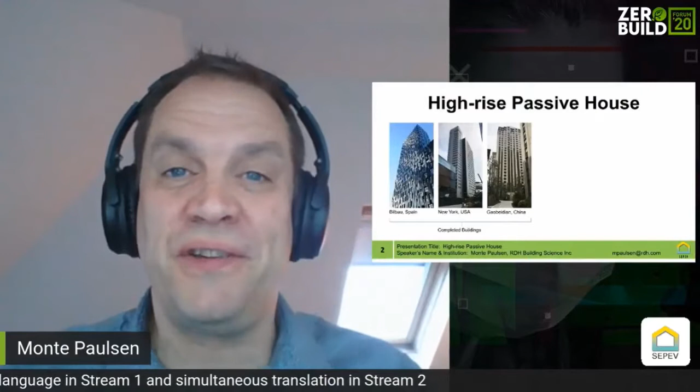So my presentation is very straightforward. I'm going to present on 3 high-rise passive house buildings that are completed: one in Spain, one in the United States, and one in China. Then I'm going to conclude with a few observations about 3 high-rise projects we're doing here in British Columbia that are still in design and will begin construction early next year.

I work for RDH Building Science. We have offices in 9 cities in North America. We do building enclosure consulting and facade engineering. We've actually had quite a few people in Turkey at window manufacturing plants, because Turkey is becoming such a leading manufacturer of high performance products. We do energy and sustainability work, including passive house, but we've also done several of the largest net zero projects in Canada. We do research and forensics, and we do repair, rehabilitation, and renewal of existing buildings.

We also happen to be the largest passive house team in Canada, working on multiple large projects across the country. We work primarily in the international passive house standard, but we also have people on our team who work in the US passive house standard, who do living buildings, net zeros, and others, and we certify projects around the world.

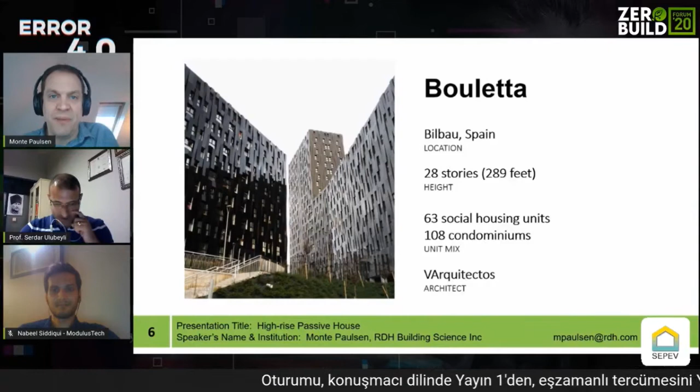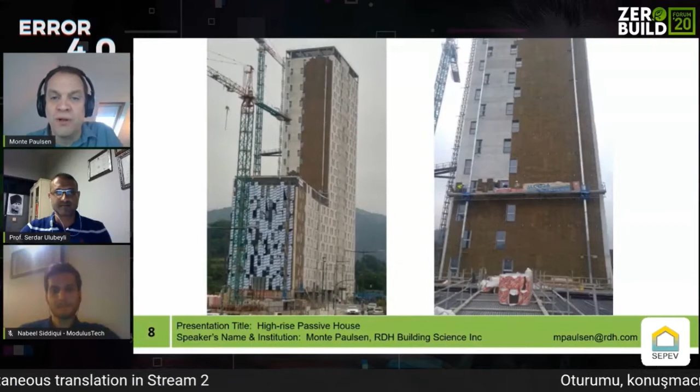Okay, the first project I want to talk about is Bolueta in Spain, currently the tallest passive house building in the world, and a beautiful example of passive house affordability. This is a very simple masonry building, a construction type very familiar to much of the world, and certainly to anyone in your part of the world. Masonry, concrete infill. Over the top of what could be a conventional building is rock wool insulation, creating a blanket that basically transforms the building into a passive house, and that's fairly simple to install.

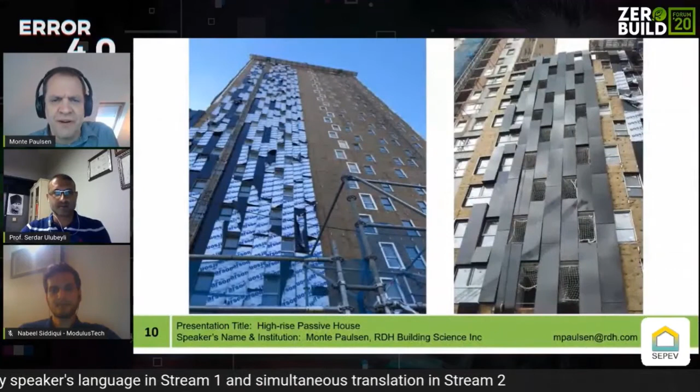It doesn't require tremendous trades training. It needs to be continuous, and the girts holding the cladding need to be thermally broken. Then a very simple cladding mechanism goes over the rock wool. The cladding also creates opportunities for the ventilation portals to come through the wall in different places. This is a mock-up of this simple system.

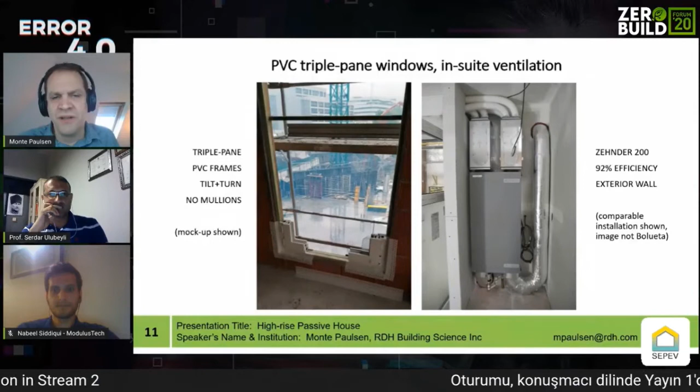Vinyl windows, again, really common windows. In fact, these types of frames are made in Turkey and many other places, being one of the most affordable ways to do windows in a large project. And ventilation like this - this is not a photo from the project, but a photo of a similar installation of Zehnder 200 heat recovery units in every unit. I know many of you have been all day learning about Passive House from some of my colleagues at Passive House Institute, so you've come to understand the importance of triple pane windows and heat recovery ventilation.

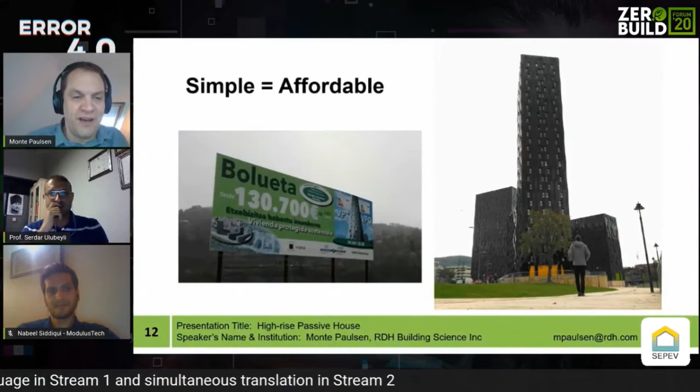This was a very affordable project for many of us in Vancouver. The prospect of buying a 2-bedroom or larger unit for only 130,000 euros would be very exciting. It's the simplicity of the approach that made this an affordable high-rise Passive House project. Really great work by that team.

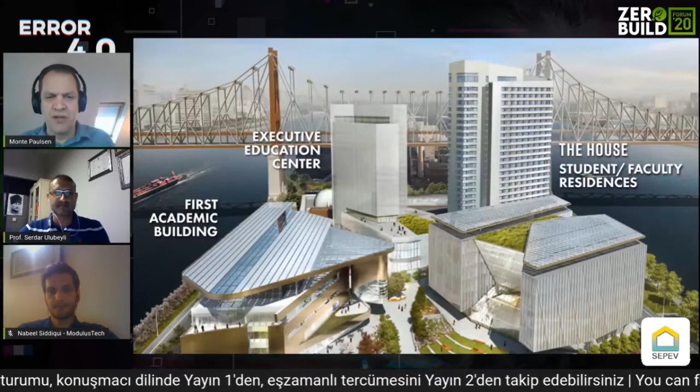This is an interesting campus on Roosevelt Island where they have four new buildings pursuing different strategies. There's a net zero project, a very low embodied carbon project, this Passive House project, and Cornell University, with this new campus, is intentionally exploring different approaches to resilient, low energy, low embodied carbon design. We'll monitor them over time and try to learn lessons between these various approaches.

The Passive House building has a fairly straightforward ground floor, with a large lobby, bike room, the kind of thing you'd expect with a large dormitory. The ground floor also has very large glazed areas - thermally broken aluminum windows that allow the view across the river to New York City.

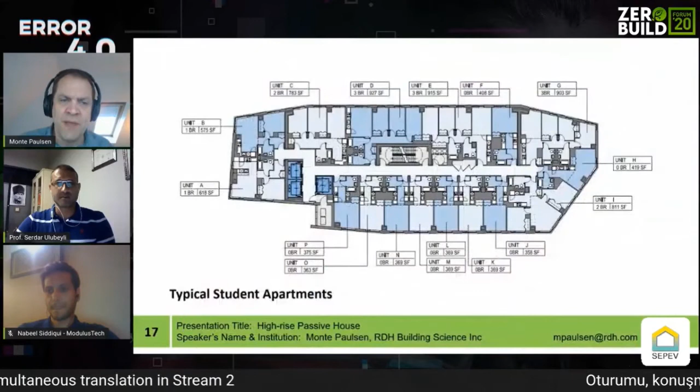As you move upstairs, the student apartments are fairly small and typical. This particular university hosts students from all over the world, so they deal with really diverse cultures as people come from many places to pursue technical education in New York. Here's a picture of a typical student bedroom.

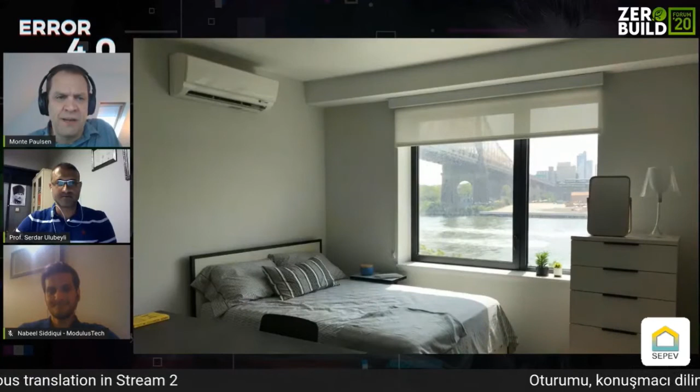You can see the small mini splits, the air-to-air heat pump system that runs for heating and cooling through the building. Inward opening triple pane windows, fairly simple kitchens in a style typical in North America. There's usually an exhaust hood right underneath the microwave.

The Cornell project did a great job of what we sometimes call strategic glazing. They put big windows where necessary, but did not overdo the glazing in other places. This is a great example of that - you see exercise rooms so often have floor-to-ceiling glazing, which is actually embarrassing to some people if they're on the second floor and someone's looking down at an awkward angle at them while exercising.

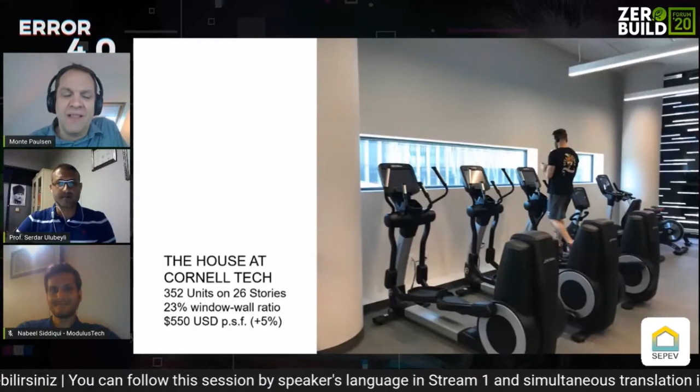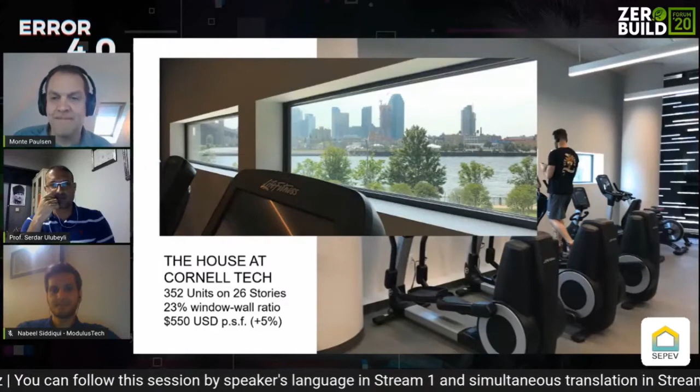This project has this well-placed, simple window that gives a fantastic view back across the river towards the city. It's a great approach where we want to start putting glass where it's needed - where it brings views, light, ventilation - but not over-glazing just because we have the technical ability to do so. This is part of what can make larger Passive House projects much more affordable. But on the upper floor where there's a fantastic view, go for the big windows.

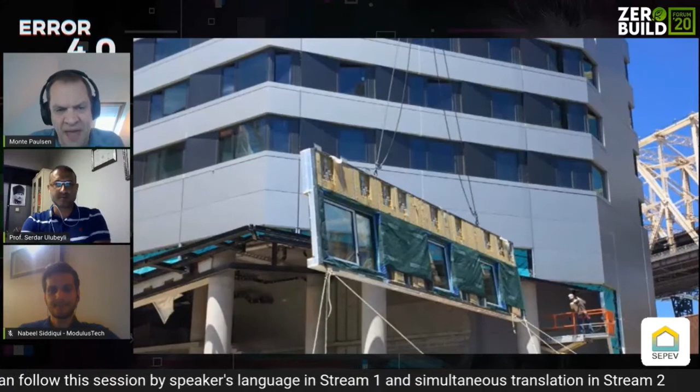This project used, like most large Passive House buildings, a double wall system with rock wool insulation in both places. It actually had both an interior and exterior air barrier. This entire wall system was prefabricated in an off-site factory. These steel-framed panels would arrive vertically on a truck off a barge on the site. They'd be craned up into place and attached to the side of the building initially with large hooks, and then workers would go out and bolt them down.

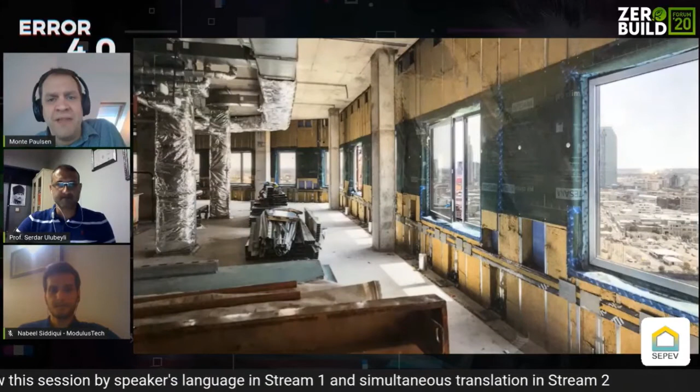If you look at the bottom, you can see here and here and here the places where they've been bolted down. And then you see the beginning of the air barrier - they've started to put in, in this case, Proclima membrane along the inside after all of the insulation has been backfilled in around the attachment points.

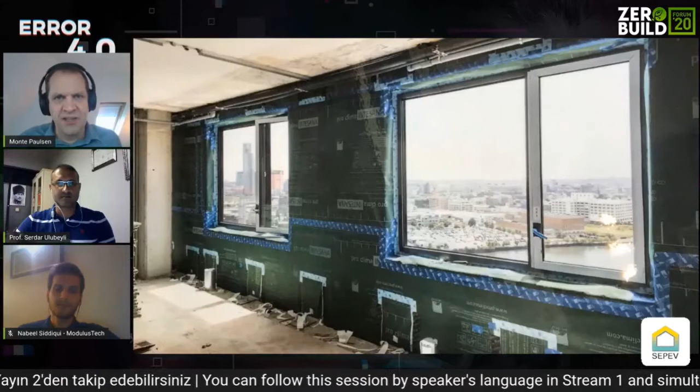Note that this is a hanging wall, not a bearing wall - the weight of these units hangs downward. It's essentially the same thing as a unitized curtain wall you might see with a traditional curtain wall building, except with completely opaque panels that are larger. The risk you face with this sort of thing is that all of the barriers - the air barrier, the wind barrier, the weather barrier - are all in the same location, so it's really important to get the connections right.

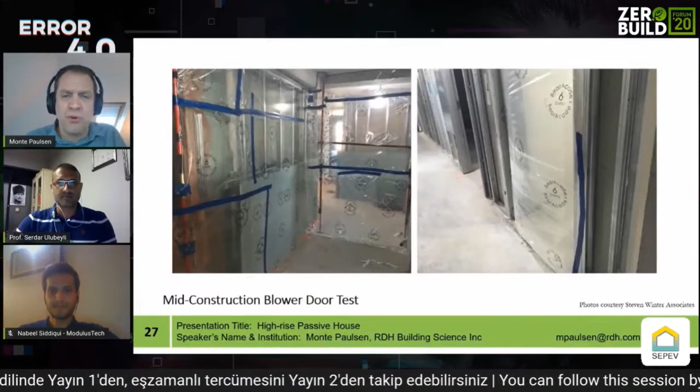Mid-construction blower door testing is a bit more complicated on large buildings - you have to seal off elevator shafts and other large areas. But at the end of the day, they ended up with a very elegant, simple enclosure on this project.

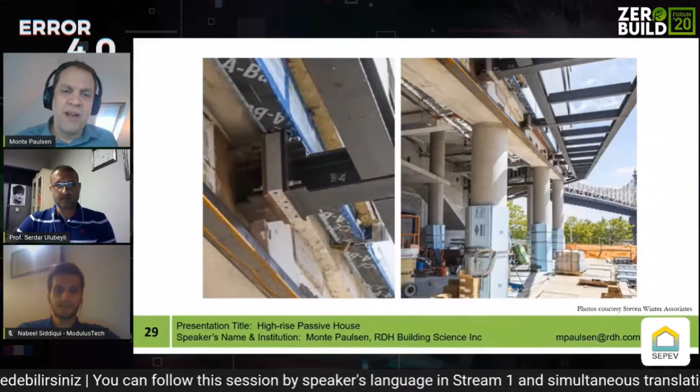Window to wall ratio of about 25%, give or take - so the glazing area is about 25% of the total. The lower glazing areas, while still providing great views, is one of the keys to making large Passive House projects affordable. Lots of thermal break products - you see here and here these thermal breaks so that the overhangs don't create a thermal bridge back to the building.

Here's another space where you see these thermal breaks on the roof for the equipment and other pieces happening up there again, and then there'll be insulation placed around that.

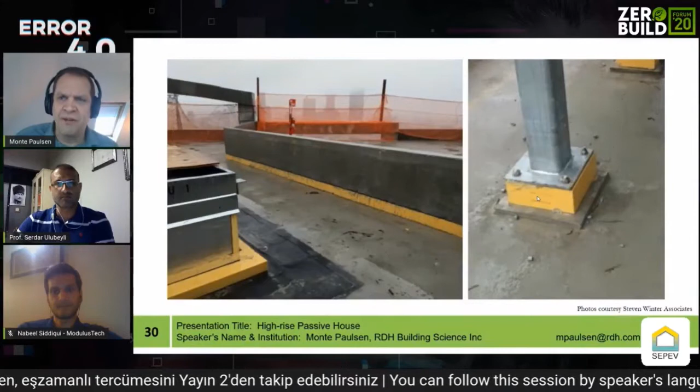Most large buildings use large ventilation systems. This used a single heat recovery ventilator on the roof, different from the Spanish project we saw earlier, which had a small one in every single unit. This had one very large HRV outside. It creates some challenges to performance assessment for certification, but these are certainly surmountable in a large-scale project.

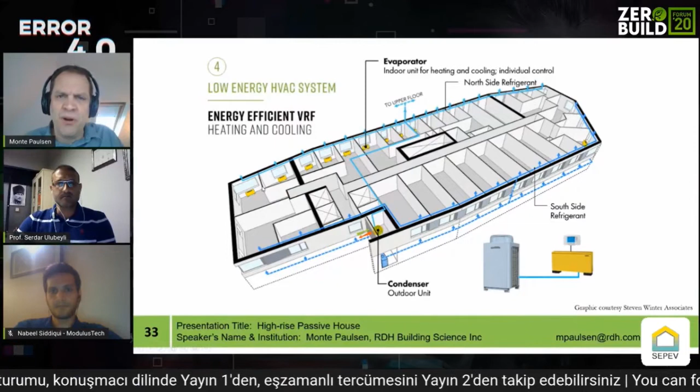In most cases, we're seeing large buildings use large units like this, but not universally. And then a regional heat pump system for cooling and heating with an outdoor condenser placed on a little balcony here, and then a local unit in each apartment. It was important, again, because this building was hosting students from all over the world.

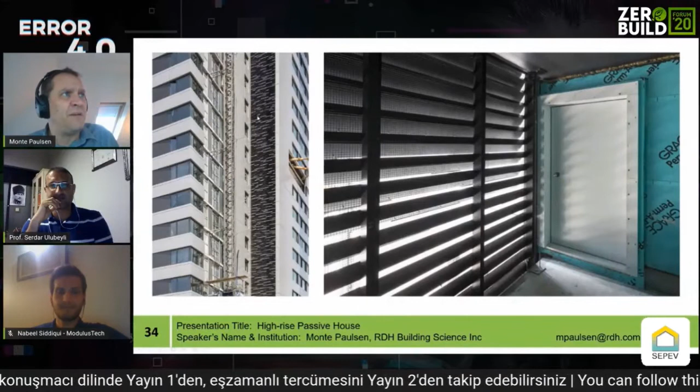This is a look at the balcony where the outside units for the heat pumps were placed. You can kind of see from the outside, it's this strip, and from the inside, it's this series of small ventilated rooms. So all in, it's becoming a really interesting campus, a really interesting focus of sustainability, and frankly, a really beautiful site on Roosevelt Island, right off the river from Manhattan in New York.

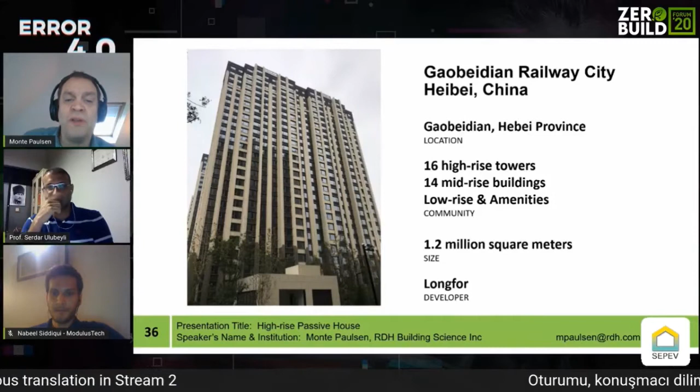The third existing project I want to talk about, while not the highest, is certainly the largest Passivhaus project in the world, in Gaobeidian Railway City in Hebei Province, China. This is 16 high-rise towers plus 14 mid-rise buildings and a variety of low-rise amenity buildings, more than 1.2 million square meters of certified Passivhaus by the developer Longfor, who is looking to repeat this project elsewhere in the world.

The Chinese, as they often do, have basically a large park with some repetition between the buildings, creating great affordability. These are upper-end owned apartments. This entire complex is a very short walking distance to a high-speed rail station. From the high-speed rail, one can be in downtown Beijing in the range of 20 minutes. So for families with resources, it's an affordable housing option just outside Beijing.

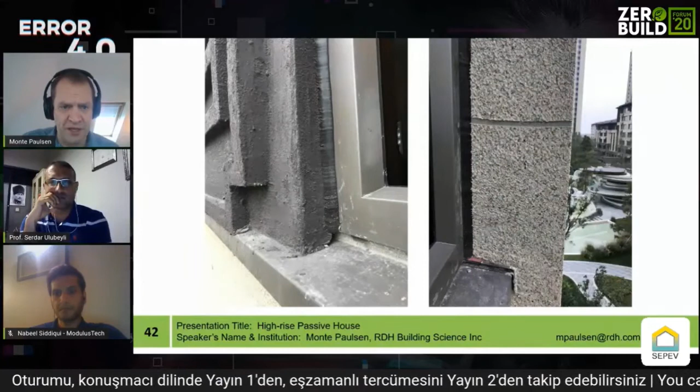Each entrance is a little different, to keep some variation, even though all the overall buildings are the same. The entrances are a mix of some actual stone and some sort of fake or faux stone where you basically have plaster over foam insulation. On the upper levels like this, you can actually see the plaster over foam fairly clearly.

So at the upper levels, it's clearly meant to be a more affordable approach to actual stone. But it's a huge project with great affordability points, great exterior shading to keep the projects cool and help lower the cooling load on all the units.

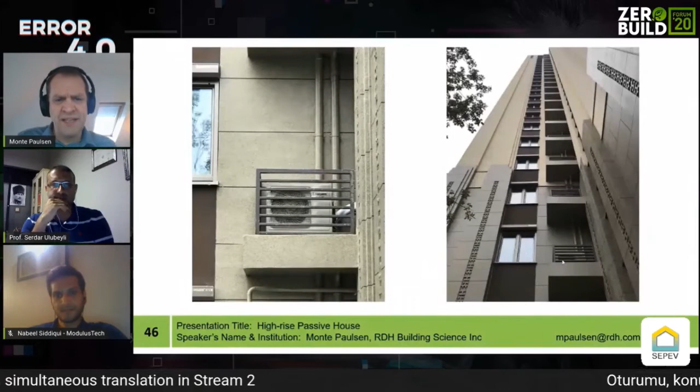Each unit has a local heat pump or air-to-air source heating and cooling device. In China, it's strongly preferred to have local units rather than centralized units, so if there's any problems, the owner of the unit can find a supplier and have it fixed themselves. And so increasingly, you see these little tiny balconies for individual heat pumps rather than having them just bolted on the outside of the building, as happens so commonly in retrofits.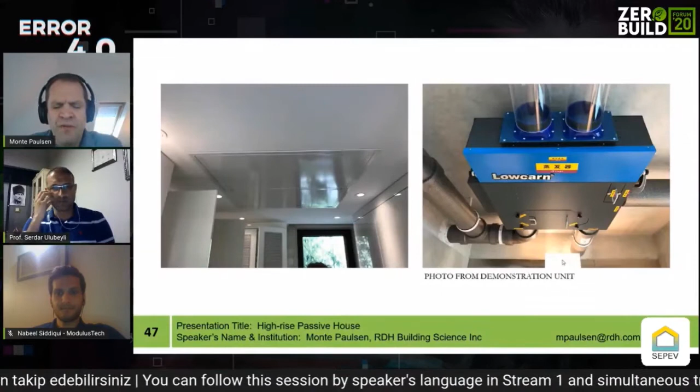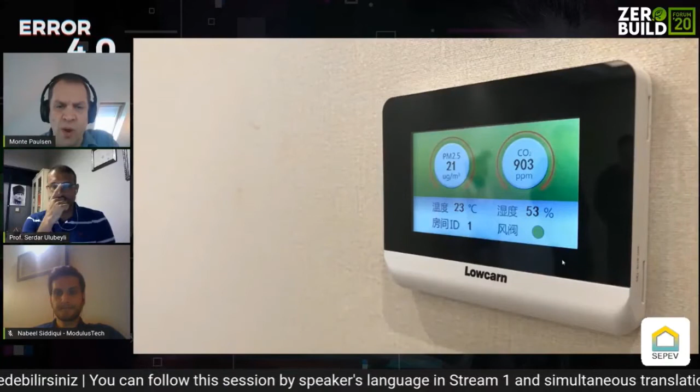We find residents in China, especially in the area around Beijing, are highly aware of air pollution. They're dealing with air pollution on a daily basis, and the numbers change. So if you look at the thermostats or the control units in their apartments, they're actually displaying real-time readings of small particulate matter called PM 2.5, or CO2 in the unit, as well as temperature and humidity all the time. This awareness of the importance of ventilation in some ways makes many Chinese apartment buyers a little more sophisticated as purchasers than at least we see in Canada and the United States.

Chinese cuisine tends to be fairly aggressive in terms of its spices and grease, so kitchens often have flow-through and extract ventilation. In North America, we cook a bit more lightly and tend to use recirculating kitchen vents.

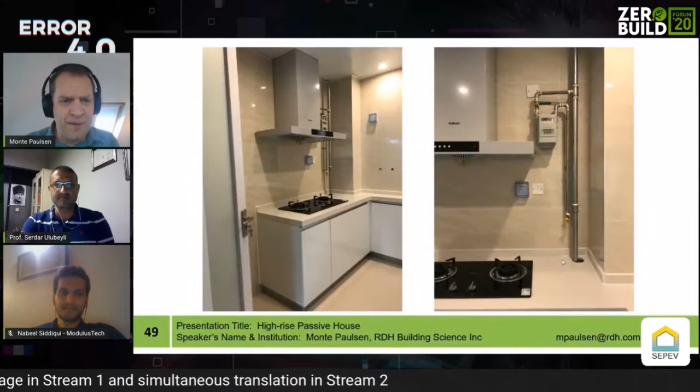Here you see a vent that exhausts to the outdoors of the building, along with the gas cooking units. The kitchen is behind a door from the rest of the unit, so cooking noises and air don't exchange with the rest of the apartment.

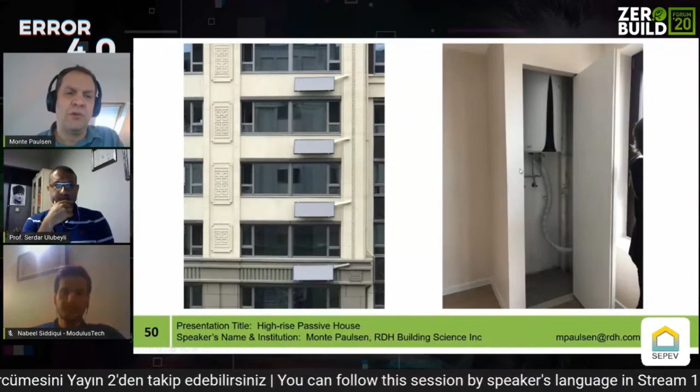Given their preference for local systems, they actually have very local solar hot water heating systems, each unit with its own tank. Here's one in the closet. Most units have their own solar thermal panel, not photovoltaic, for hot water, with electric resistance backup in case the solar thermal doesn't provide enough heat, so electricity can kick in to pick up the rest.

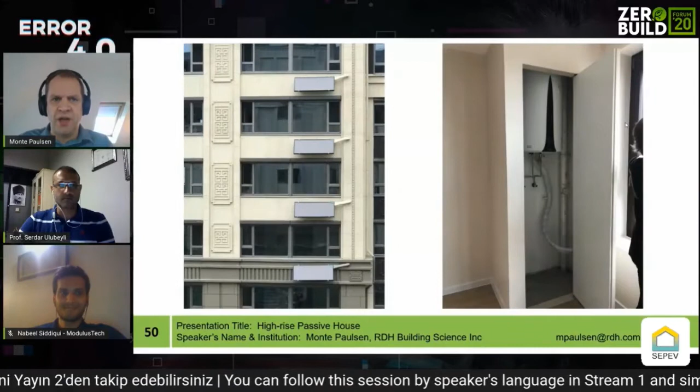This is a strong approach to affordable, repeatable units. A side benefit for China is that by making these components at the apartment scale rather than the whole building scale, the component market has become competitive, with multiple providers of great windows, small energy recovery ventilators, and small hot water systems. This gives them the component supply they'll need in the coming decade as they undertake a wave of retrofits of older buildings to more energy efficient standards.

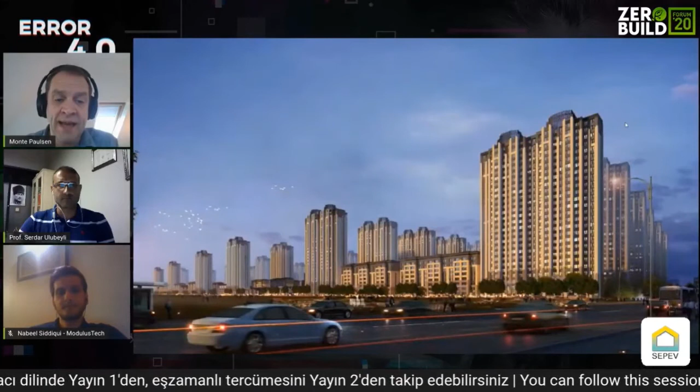I'd like to wrap up briefly with a look at three buildings not yet constructed that our team is working on here in Vancouver, Canada.

Briefly, Alberni Towers is a more traditional project, not unlike those you just saw. It will be concrete frame, heavily clad on the outside, built by Asia Standard Americas.

It's actually a partly Chinese-backed project, designed by Robert A.M. Stern Architects, a very traditional New York architect who's done many signature apartment buildings in New York. A2M is the passive house consultant, based in Belgium, so it's a truly international team, and we at RDH Building Science are the building certifier on this project. It's due to go into construction next year.

Another tower I want to show you briefly, which we call the Earth Tower, is very different and a bit shorter. This is passive house and mass timber, so there's some concrete at the foundation and frame, but most of the tower is actually made of wood.

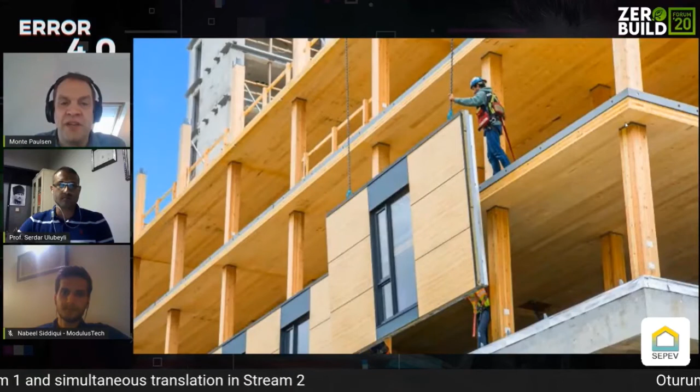This is so the wood doesn't get damaged during construction, which drives us to a panelized approach, similar to what we saw in New York, where large panels come in and connect on buildings of this type. We're doing several large timber high-rises.

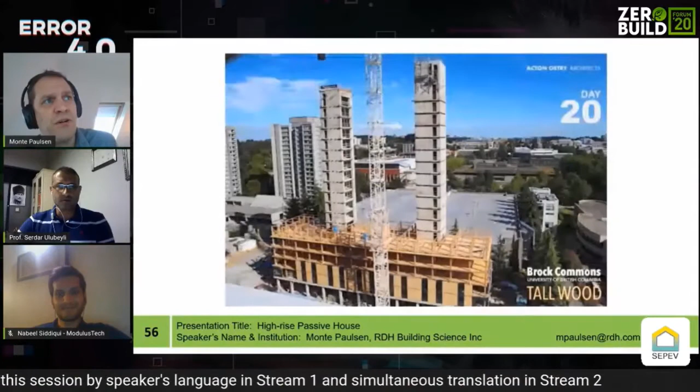This gives a sense of the timeframe, where you can watch the story-by-story progress of wooden deck planking, with the cross-laminated timber going up every day or two, and the enclosure keeping up just a few days behind to keep the materials safe and dry. This type of construction takes more time to prepare, but the framing and enclosure happen very quickly, in this building taking approximately two months, compared to the six months construction might typically take under other circumstances.

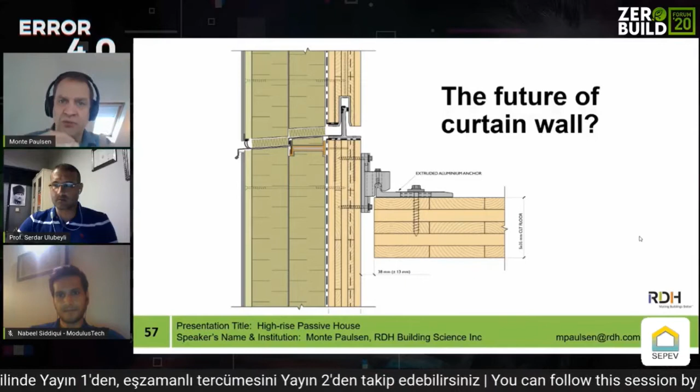In some ways, we see this as the future of integrated curtain wall systems. We might see a wood platform with wood-backed panels, much like the ones we saw in New York, except different, with heavy exterior rock wool and pieces mounted in. They still have that expansion joint, sometimes called a chicken head, just as unitized curtain wall has, so the building can move with wind, earthquakes, and other conditions. This gives a sense of what that might look like.

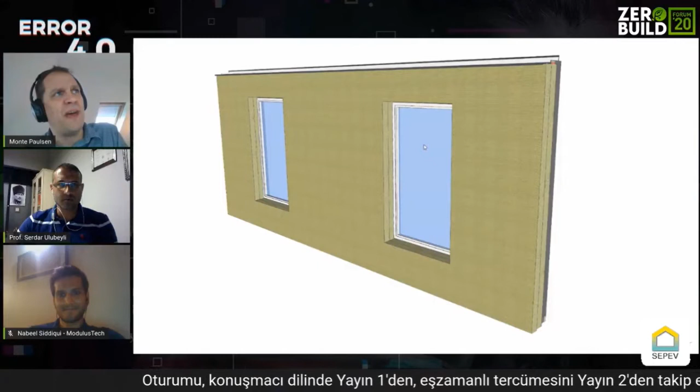When we build these, it's often necessary to change them at the corners because different shifting loads prevent you from creating two large panels meeting in the corner. So the design of the corners and connections becomes really important so buildings can continue to move. And while the inside is made of wood and the panel itself is made of wood, the outside could be clad in any way you choose.

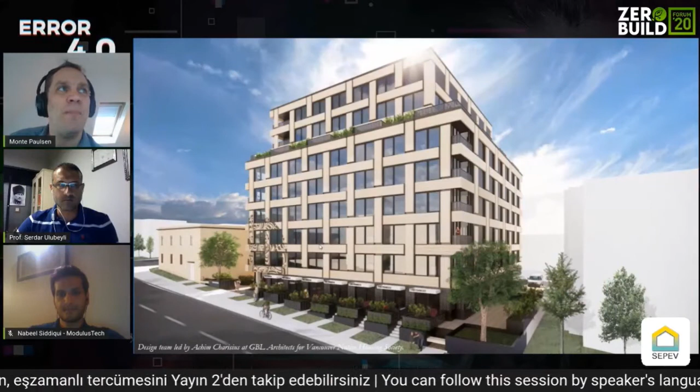We do have one project that is also hoping to clad the outside with cedar in this somewhat basket-like format. This is a building for First Nations, our Canadian Aboriginal groups, housing here in BC. I'd note at RDH Building Science we have several specific guidelines about tall wood, so if you're interested, feel free to get in touch with me or someone else at our firm, and we can help you with that.

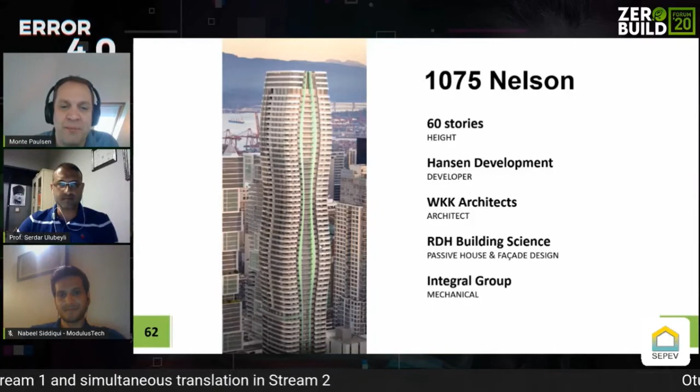And finally, got a few minutes left. 1075 Nelson, when finished, would be the tallest passive house project in the world at this time. It'll be 60 stories in height. Hansen Development is the developer. WKK Architects, Tom Wright, is the architect—this is the same guy who did the Burj Al Arab in the Middle East. And we are the passive house consultant, facade designers, and other pieces.

This building, while it's vertical, will be a mix of community. There will be social housing on the bottom 15 floors, market rental housing in the lower area, and then luxury-owned apartments in the upper regions.

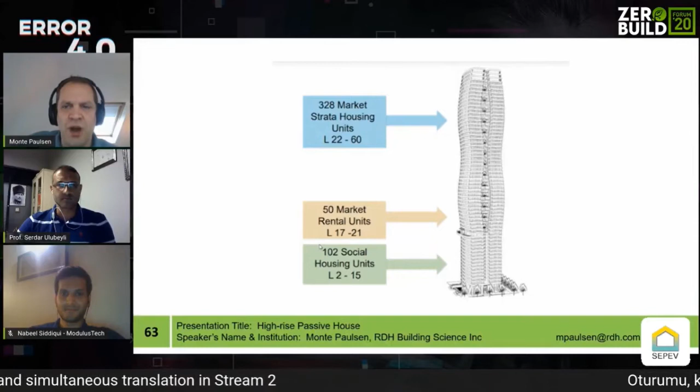The facade will be quite challenging. It looks like a lot of glass when you first look at it, but if you look closely, you'll notice there are glazed sections surrounded by opaque sections in between, giving the sense of a lot of glazing area, but the actual total glazing area is slightly less than 45% on this project.

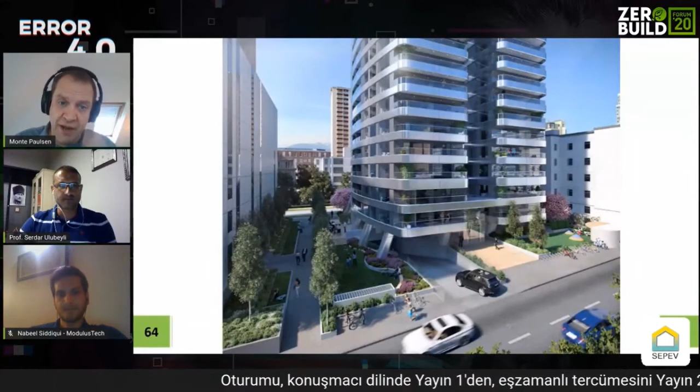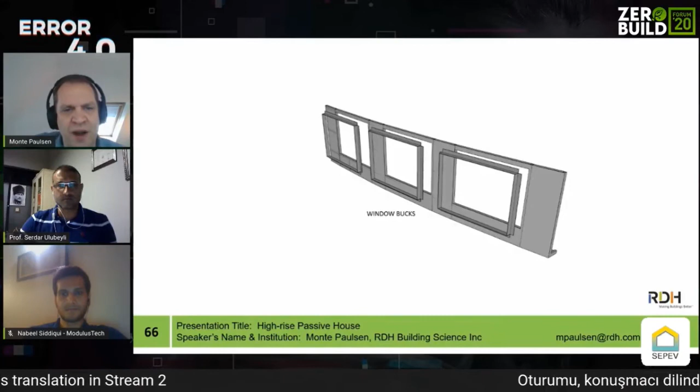Working it out through the curves has been a real challenge to figure out how to fabricate. The approach we're pursuing looks something like this: we will build a steel frame structure that will niche and nest, going either over or under each other as they work their way up and down the curves. Over that would be installed window bucks to hold the window into the frame in a thermally isolated way. The windows would then install into those bucks, with insulation—exterior rock wool insulation—in thermally broken attachments outside of those.

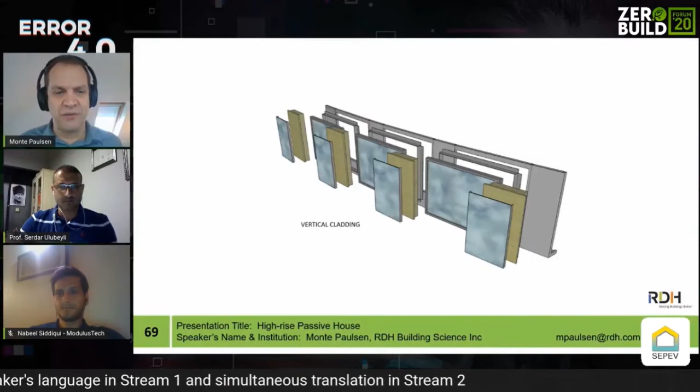Outside of the insulation is cladding that is also made of glass, giving the impression there's a solid line of glass across the building, though in fact it's not all transparent—much of it's opaque. Then there's additional insulation at the top and bottom, with a metal band over that, which allows us to have the step either coming out or coming in, depending on where you're at on the building for the curve. It all comes together to look similar to the rendering you saw before.

It's definitely a signature building in Vancouver, one of the tallest sites in the city. In addition to being one of the tallest passive house buildings in the world, it would be the tallest building in Vancouver, just by a few meters. The building next to it, called the Butterfly, is another project we're working on, although not passive house.

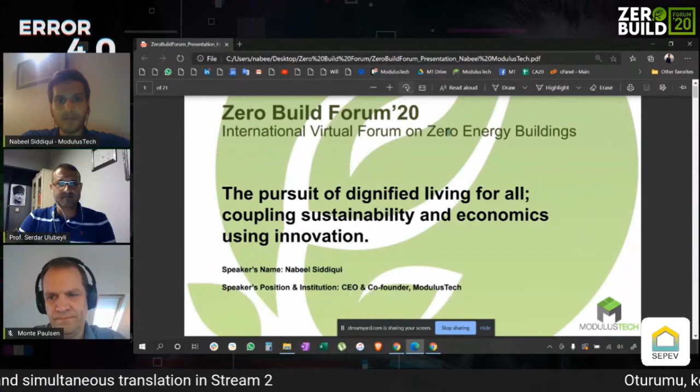So my journey, once I started it, wasn't just limited to the Syrian refugee crisis. We saw that all over the world there was a huge crisis in terms of affordable housing. It wasn't limited to Syria. All around the world, there were over 1.6 billion people that lack adequate housing. And even though housing is such a basic need, there was not much that current technology could do.

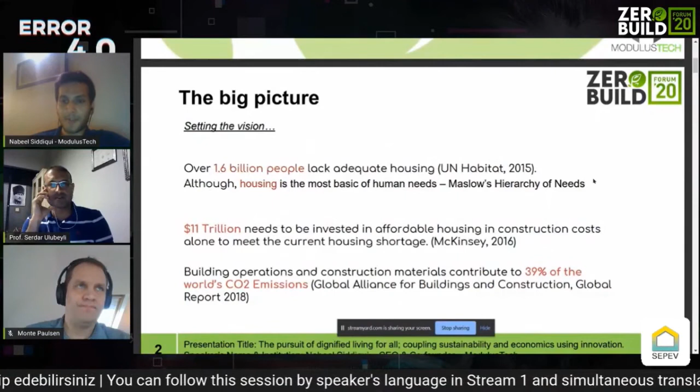There's a McKinsey study that says in order to address this issue, we need to invest $11 trillion in construction costs alone. And that's what I found really troublesome. But let's say we do manage to get those capital resources - the biggest issue, looking at the scale of the issue, is that if we continue to build the way we do today, it's going to push climate change beyond the tipping point. So whatever we have to do, it has to be extremely sustainable and cost-effective.

So this is how we set the vision for our company, and I'm going to run you through a product development cycle that we went through. Based on these few metrics, we decided that whatever we do, it has to provide dignified living, provide at least basic living standards to the occupants, and we want to create houses that can reach the most amount of people - people in high population countries and people that currently lack housing, even basic housing.

So we want to reach the most amount of people. Thirdly, the solution must be cost effective. And fourthly, it must be sustainable, so we don't push climate change beyond the tipping point. So these are the four primary objectives we started with.

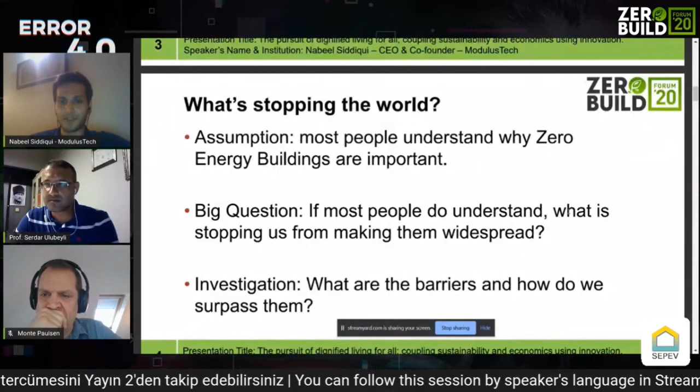And what we really struggled with initially was: what is stopping the world? There is ample technology available out there, but why do we not see zero energy buildings being more widespread? So this is how we went through that investigation, asking what are the barriers around zero energy buildings, and why we can't make them more widespread. First, we started identifying specific pain points.

We started talking to a lot of organizations working in affordable housing. Also, we started talking to a lot of end users and contractors as well, because let's say we do get a really good solution, but there's a lack of skilled labor, for example. So I'm quickly going to run you through the most common pain points that we identified.

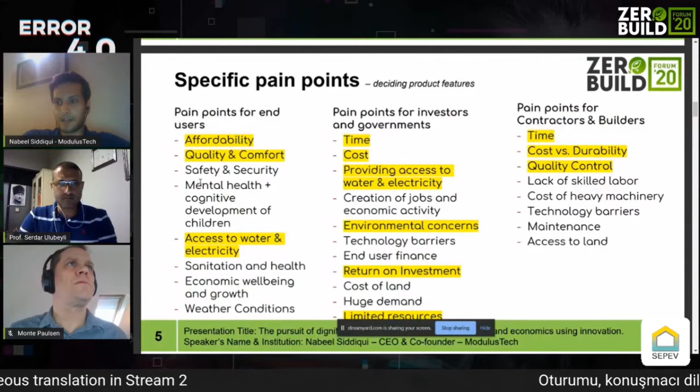Number one for most people is affordability. Similarly, the quality and comfort of the house - how safe you can make that house, how the environment can provide better living conditions and result in better mental health and development of children. A lot of these countries we work with are developing countries with limited resources, limited water and energy. So how do we provide water and energy sustainably to such a large population? So these are some of the pain points we start with.

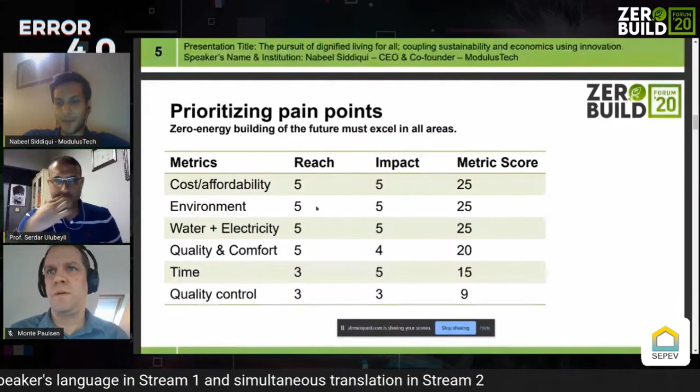So we identified the most common pain points and started prioritizing them, giving them a score in terms of reach and impact. By reach, we mean how many people this particular feature can affect. By impact, we mean how much difference it can make in one person's life if we really solve this problem. This is just an example of how we set out to do it, and we started giving a score for every pain point.

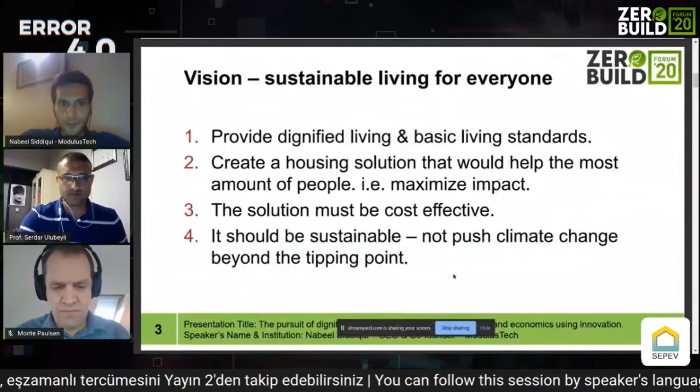Next, we started looking at current technologies available, and we came up with this moonshot idea that should meet all these conditions. It's confusing because if you look at the vision, if you want to provide really good standards of living, you have to compromise on cost. And if you want to provide something that's very sustainable, again you have to compromise on cost. So that's the kind of problems we were looking at.

The next step was that we started identifying different solutions available on the market. This is specific to markets - there can't be one such metric globally. It depends on which markets you're looking at. We initially were looking at developing countries and places where there's abundant and inexpensive land.

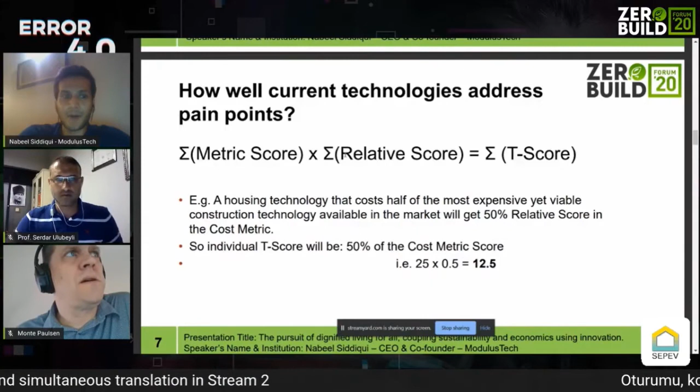To give you an idea how we started calculating this, we took a metric such as the cost metric, for example, which has a score of 25. We took a relative score of an existing construction method or technology. Let's say there's a housing technology that costs half the most expensive yet viable construction technology, so that gets a score of around 50%. Then you multiply the metric score by that relative score and come up with a technology score for that specific metric. You sum up all these metrics, and this is what we came up with.

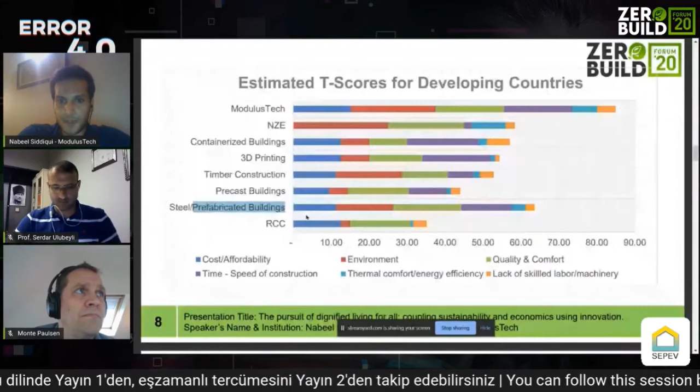We looked at the most commonly used construction methodologies, as well as our own that we were developing, and we saw that prefabricated buildings were actually quite far ahead compared to other kinds of construction available. We also looked at 3D printing, and we got a lot of data and worked around with that.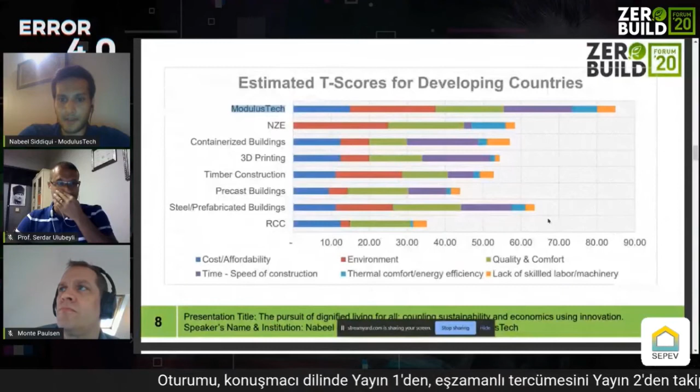In the second part of the presentation, I will share what we did that got us a higher score than other technologies. So this is us, and our score is around 84. Again, there is no limit to the score, but we got a higher score than the other technologies available.

So the solution was simple. We designed a house that's net zero energy, cost effective, and meets all the metrics that we have. Then we coupled it with solar-based mineral water purification systems, as well as solar energy systems to provide clean electricity for these houses.

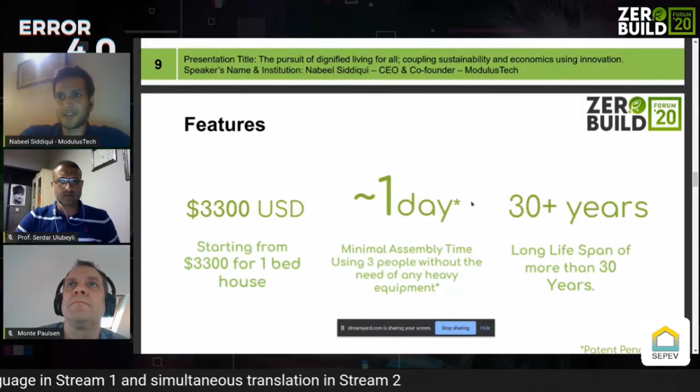The first prototype we came up with was a 1-bedroom studio costing as low as $3,300 and could be assembled in a day. So imagine a house that you can unbox and set up yourself within a day, and it could last more than 30 years.

Some more features of the house were that all our designs follow international building codes in terms of their architecture and structural strength, so they're resilient to earthquakes and strong winds as well.

We utilized a very resource-efficient design and something that was very fast to build, because labor cost in a lot of countries is really high, and we decided in order to minimize the cost as much as we can, we have to reduce construction time as well.

Similarly, we kept the design very DIY, do it yourself, and modular, so people could build these houses themselves and they wouldn't require any heavy machinery or cranes, for example, because that also comes with a large cost.

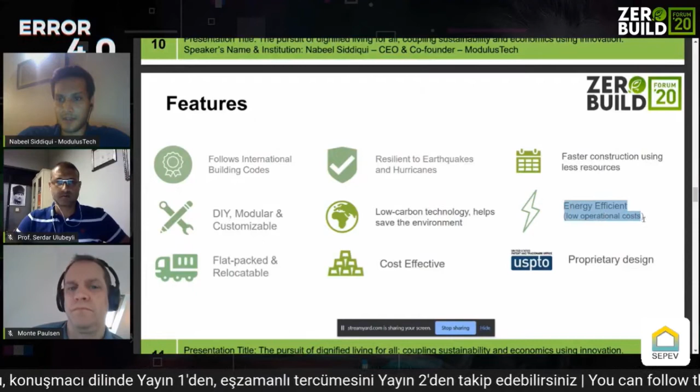And then we kept the buildings energy efficient, and again we're designing them for moderate to hot climates, so our values are moderate, not extremely high, but something that's a balance between the cost and the resistance insulation.

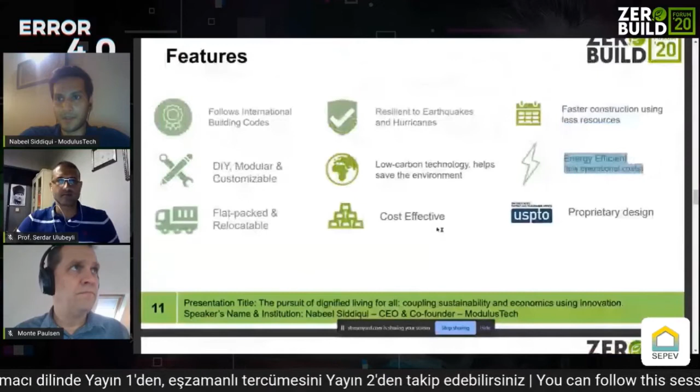We also decided to keep the design flat packed, and the reason for that is we saw us working not just in one country or one region, but being widespread. The solution we came up with was so industrialized that if it was flat pack, it would be easier and more economical to transport the houses around.

So all these features somehow add up to be a house that looks something like this. It's a flat pack structure. You can ship it anywhere around the world, and you unpack it and it's assembled very quickly, and then it's connected with electricity and water.

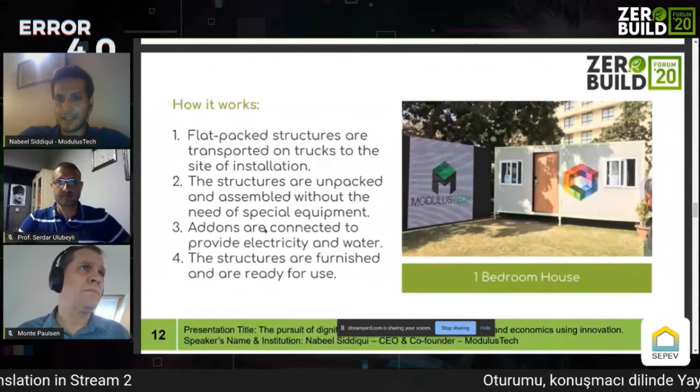So it becomes a completely off-grid structure, autonomous, with its own electricity and water. And this process takes around 2 days.

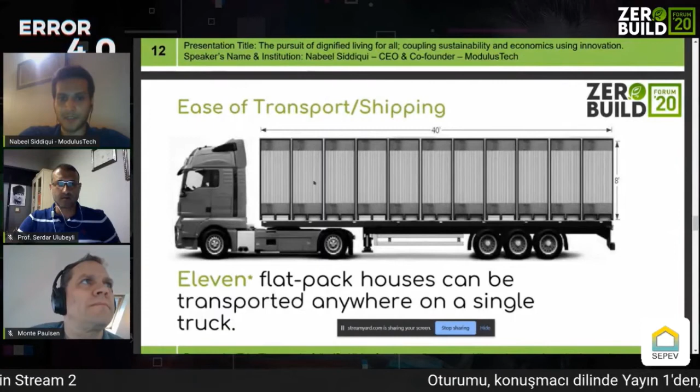First day you assemble the house, and the second day you're done finishing the add-ons and the finishes. So we can pack 11 such houses in a single 40-foot container.

We've done bigger units as well, 2-bedroom, 3-bedroom houses. For that, we can pack a few less houses per container. But again, the per square footage transportation per container is around the same.

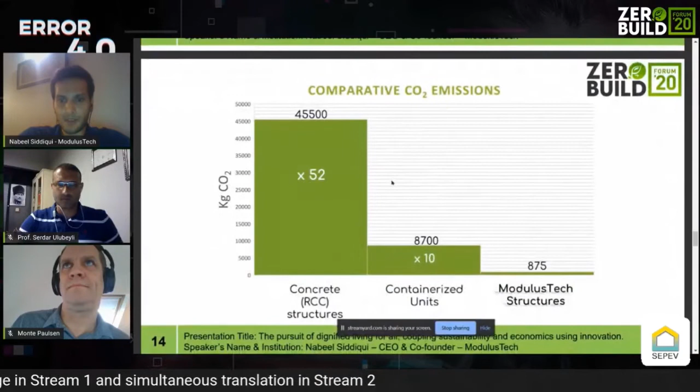We've initially calculated the embodied carbon, and we compared it to some of the most commonly used construction methods, and we found that we were 98% lower than what was being used most commonly in the market.

And then the add-ons is where these houses become net zero energy over their life cycle, because they're contributing more energy than they're using.

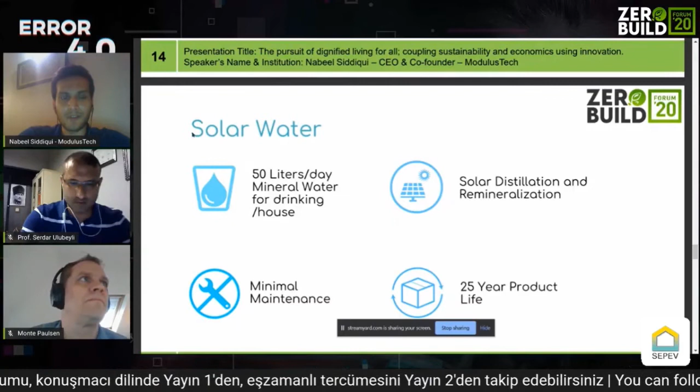So we added this. This is actually a machine that we're using from a Turkish partner, manufactured in Turkey. What this machine does is it purifies any kind of water into mineral drinking water, and it runs completely on thermal solar panels.

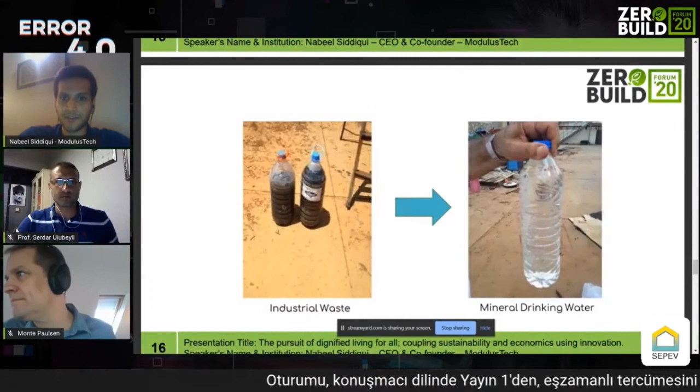So it can take something like industrial waste and convert it into drinking water. And again, it's very cost effective, and I'd be happy to share the details of this company as well.

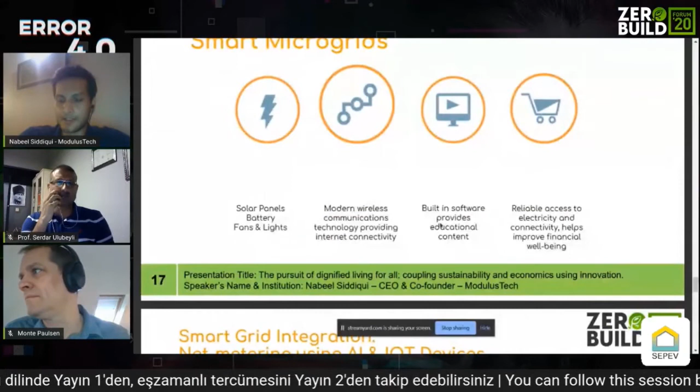Then we have some more partners that have these AI-enabled smart microgrids. What they're doing basically is sharing solar energy between the houses. So each house has a shared system of solar energy, but then they're also linked with satellites, and that's how these units calculate how much energy to save and how much energy to give back to the grid.

That adds to the cost effectiveness of the solution. And again, each house comes with IoT devices, so they can calculate the kind of thermal comforts that are required.

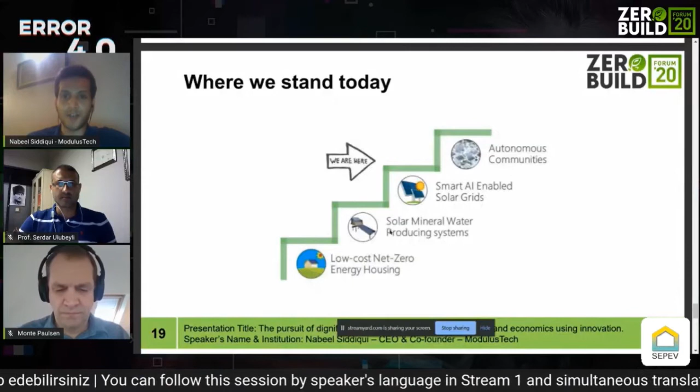So this is where we stand today. We've come up with a house, we've coupled it with water purification systems, we've coupled it with energy, and now we're one step away from creating autonomous living communities. And we'll be building the first one very soon in Pakistan, and we're looking at the African market as well.

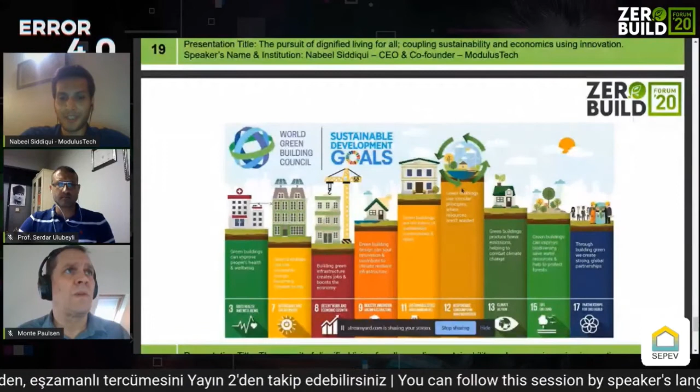So this is what keeps us going, is that something such as social green housing has so many impacts. It can help with economic development. It indirectly helps 9 UN SDGs. And this is why we feel that zero energy buildings should be the future as well.